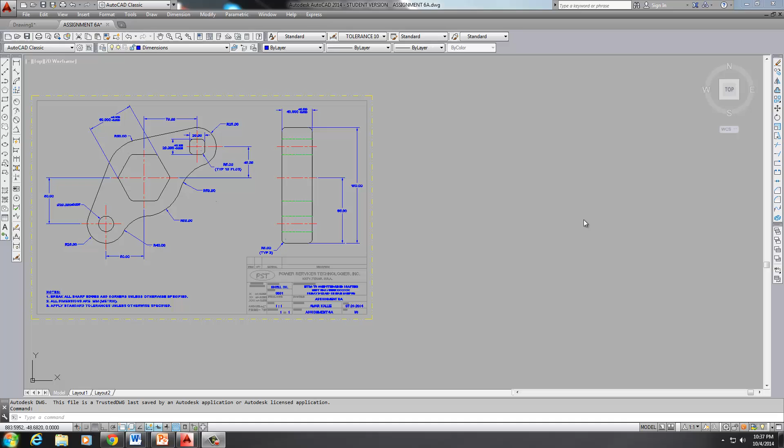I'm just going to show you how to draw this piece. This one is not that hard, should be pretty quick and easy.

First of all, you take a look at your part and you see that everything is based on this center point. So that's what we're going to work off of, surrounding the part around the center, start building it.

So we've got a polygon right there, we've got a circle right there, as you can see, and then we've got positions for these center lines here that we need to create by offsetting these numbers here that you see. So it's offset, then we've got offset for that one and for this one to get the position of this, and it's another polygon in the center of that, and it's a circle and another circle and another circle there as well.

Then all you're going to do is you're going to line, do a tangent. Remember back to our first assignment, 2A, where it had the light bulb and those circles that you had tangents to. Basically it's just a line, tangent to this circle, tangent to that circle. Another line, tangent to this circle, tangent to that circle. And we're done with those two lines.

Then to create these two radiuses here that you see, it's going to be a fillet. And of course there'll be a circle here. And you're just going to fillet between here, this radius. Fillet, radius 40, and touch the two circles, and it automatically puts it in. And that should be it.

And then I'm going to show you really quick a shortcut on how to quickly put fillets on all these edges that you see. Very quick.

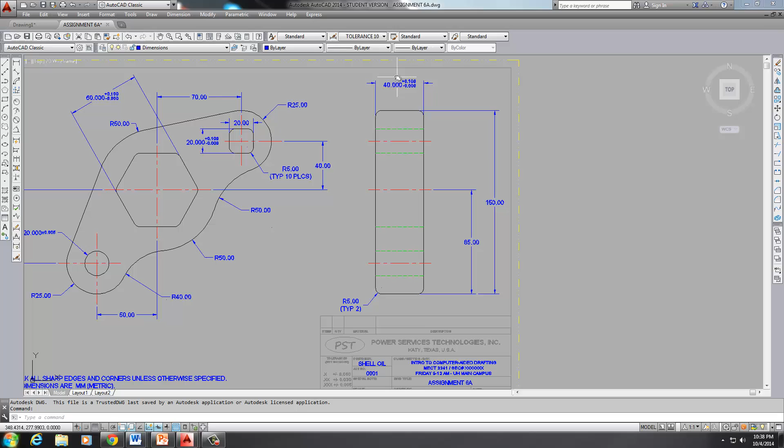Alright, and this is basically the projection, gives you the thickness, and that's where you find your volume and your area. You need those numbers. Alright, so we'll do it really quick.

So let's see here. Got to go back and forth with the numbers. Probably, let's see here, we've got radius of 50. So let's start off with the circle.

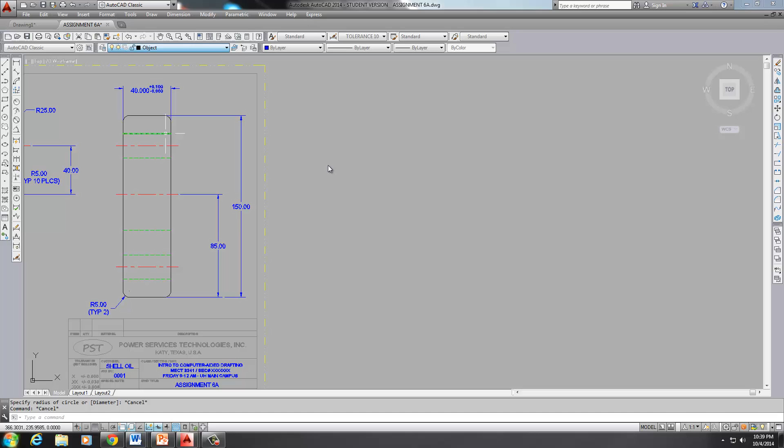Make sure I'm in my right layer, which is going to be object. And let's start off with that center. Just put the center lines in first. We could put that circle in if you want, which was what? A radius of 50. There it is right there. That's radius 50. So I got that.

Then let's do a polygon. Center of, polygon. How many sides? 6. Center, right there. And it's circumscribed or inscribed. You always want circumscribed. That defines, it's defined by the flat to flat dimension, which in this case is 60. So circumscribed. And what is the radius of that circle? 60. Ooh, and I put 50, didn't I? So let's get rid of that.

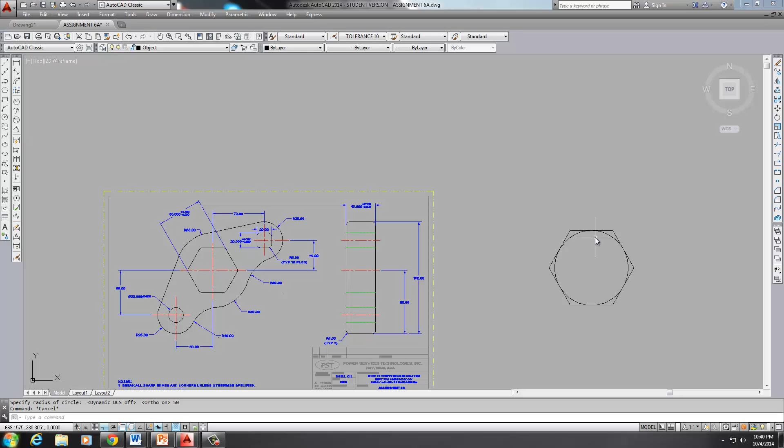And let's do a polygon again. Number of sides 6. Might be better if I typed right. Circumscribed. Hit F8 and your piece will stay straight. And all you do is hit 50 for the radius. And there you go, that's circumscribed. Is that correct? 50? No, it wasn't 50. It was 60 between flats, which is half of that, which is 30. So let's do that again.

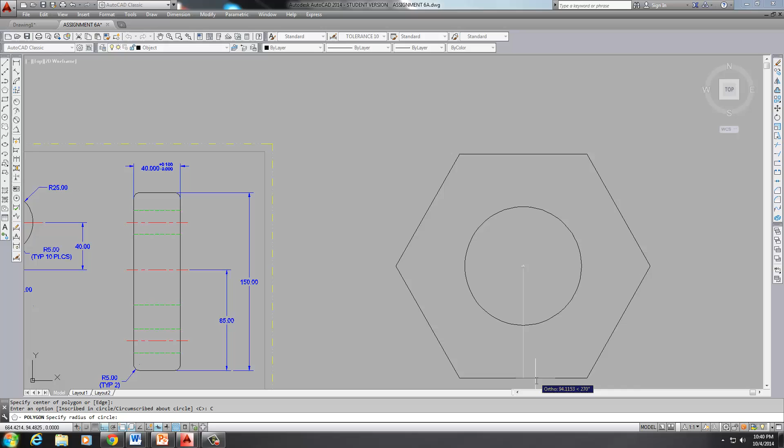We all make mistakes. 6. Center is right there. Circumscribe, and it's straight, right? And what do I want? 30. There it is right there. Now that's your hexagon in the center.

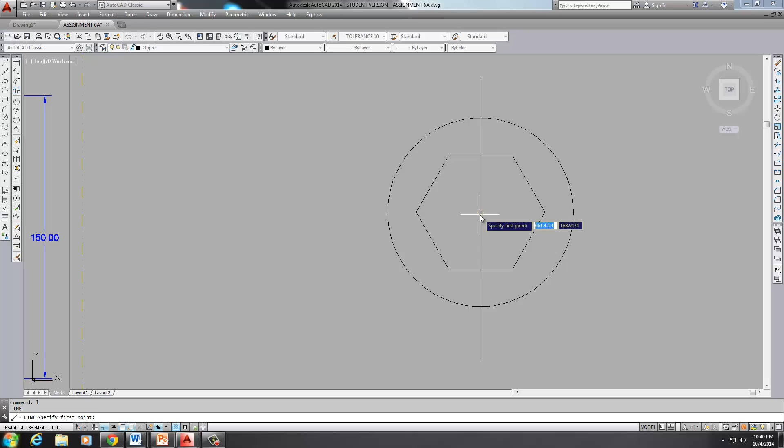Now let's go ahead and draw some center lines. Just put some lines in. Just extending them down. Do another line. Center of this piece. Out. Come out here from here to here. And then what do we do? Change this to a center line layer. So I have my center lines, right?

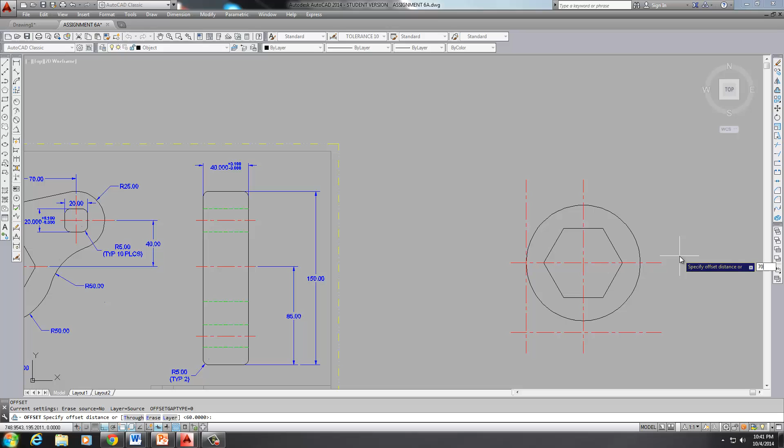Now I can do my offsetting, which would be 60 in the Y and 50 in the X for this side. So offset 50 going X, going to the left, and 60 going down in the Y. And I've got my center point for that. Then let's do the other side, which is 70 over and 40 up. Offset 70 over and 40 up. And I don't have an intersection, just grab that and just go across, so I got some kind of an intersection there. Alright, so now let's draw.

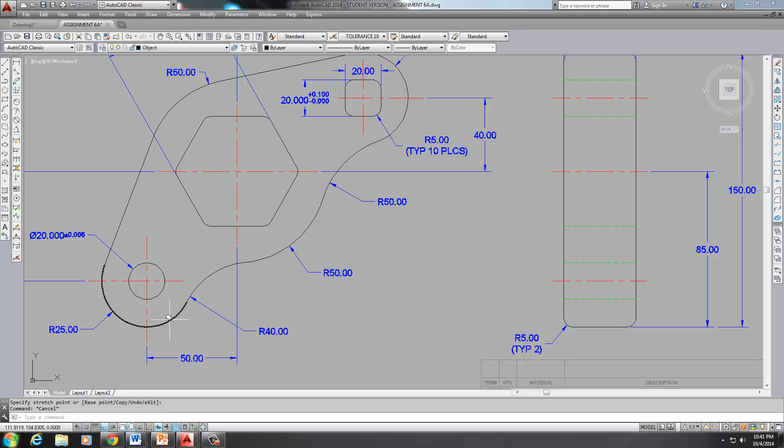What do we have here? We have two circles, one on the inside, one on the outside. So let's do those two. One's a 20 diameter and the other one's a radius 25. So let's draw a circle. It's going to be at this center point. Diameter of 20. And then another circle, center of that again, and that's a radius of 25. There we go. Circle over here, radius of 25.

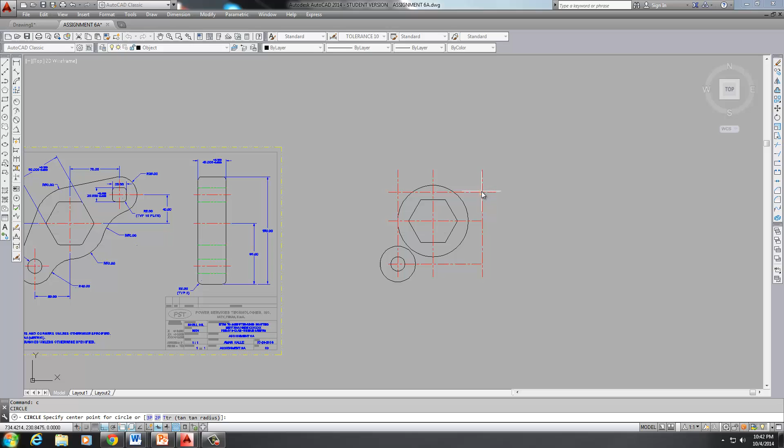And then we're going to put a polygon inside there. Polygon. How many sides? 4. Center is going to be CEN.

And circumscribed, right? And what is half of 20? Ten. There you go. So we've got those parts.

Before we do anything else, I'll show you how to put the fillets on these quickly. If you notice, when I put my mouse over it, it's called a polyline. It's one piece, and a polyline can be edited using a command called pedit. Now, in our case we're not going to use pedit, but I just wanted to show you what you could do if you had a polyline. These are all the options - you could join it, change the width, or change all kinds of things. In our case, we're not using that command, but it is available.

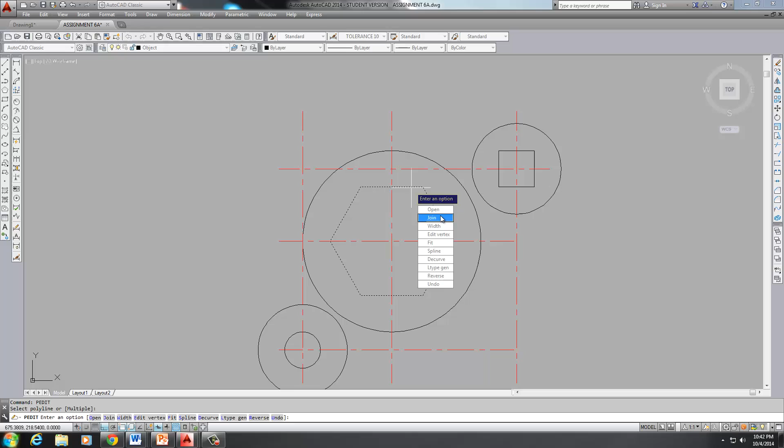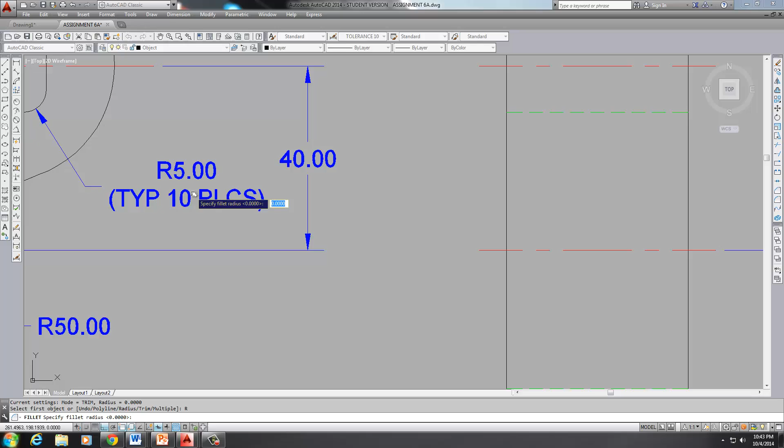In this case, we just want to do a fillet, so we're going to use F. Down at the bottom you've got some options again. This is a polyline, so I'm going to pick polyline. But before that, let's get a radius. What radius do we want? I believe those are radius 5 in 10 places, which means 1, 2, 3, 4, 5, 6, 7, 8, 9, 10. Those are your 10 places. So it's a radius of 5.

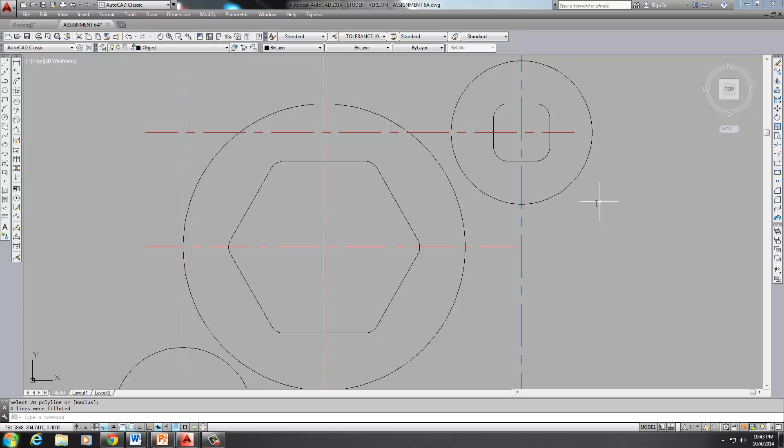Now I want to do a polyline, and I'm going to pick this one polyline right here, and look what it does - it puts a fillet on everything in one shot. Do it again, polyline. I'm going to make sure I hit fillet and polyline again. It only lets you do it once - you have to hit polyline again to do it again. There we go, so I've got what I wanted to do there.

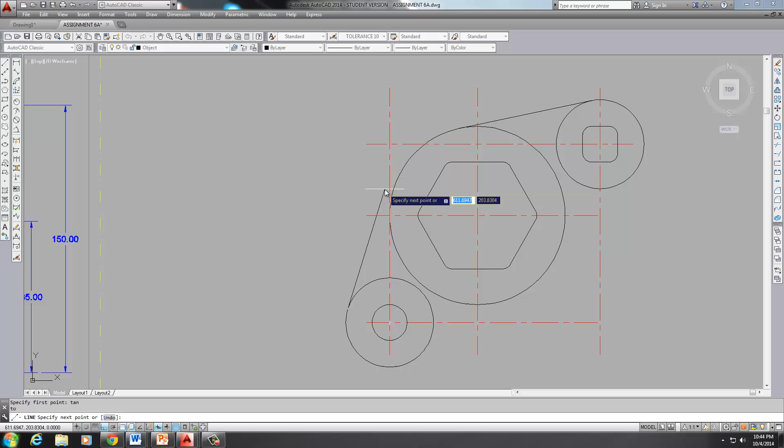Now let's do that thing like I said for assignment 2A, which was a line going from tangent, T-A-N, of this to tangent of this. Another line, tangent of this to tangent of this. There's the top piece of that.

Now, the two lower ones are two curves, right? Two fillets. So why don't we use a fillet? Now you can put a circle in there and trim out and all that stuff - you could do that too. 2-point circle or TTR, because you know the radius, so you could do that too. But we're just going to do a fillet. And what's the radius of the first fillet? It is 40, so we're going to do R 40.

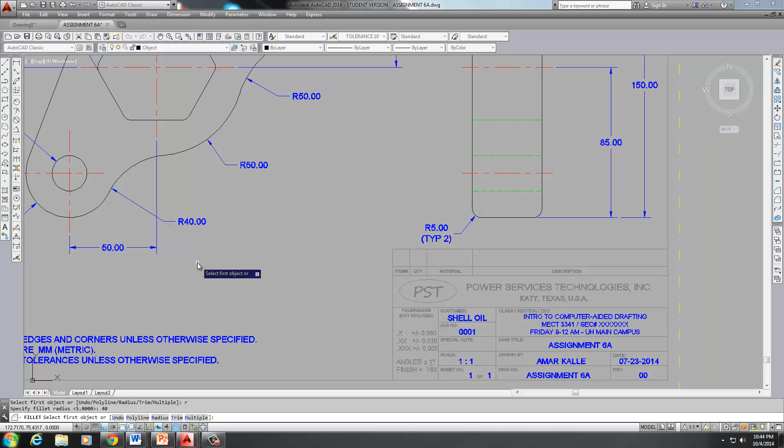All I do is touch this circle right here, touch this circle right here, and it puts it in for me. Now what about this one? It's a radius of 50. So let's go fillet, radius 50, and touch that circle, and touch this circle, and guess what - it puts it in for me.

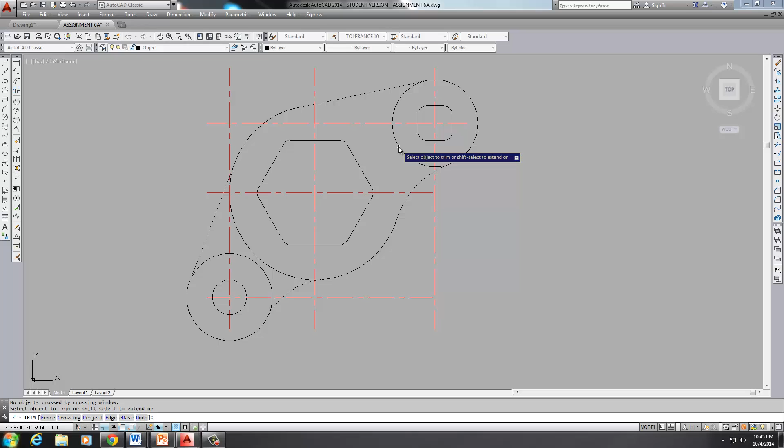Now what I need to do is trim. So TR, let's trim out from that, and this, and this, because everything on the inside should be gone, right? So that's this, right, this, and those two. There we go - so our part is pretty much done.

All good. Now you just need to put dimensions on it, and I'll let you guys play with the dimensions. That's just a matter of trial and error, and everything should be good.

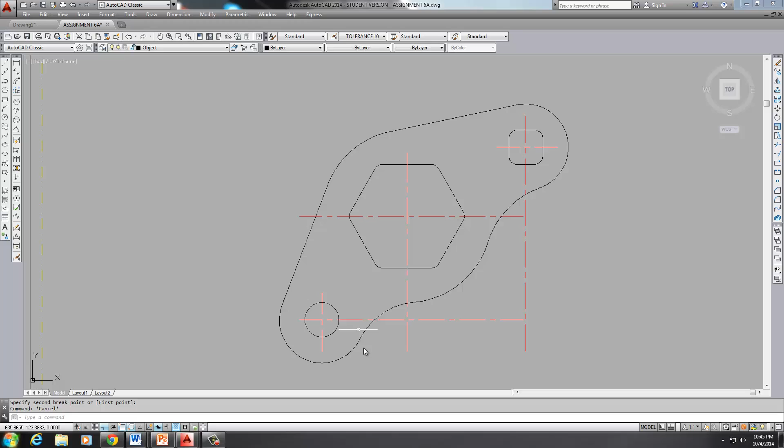Now, another thing, just to quickly show everybody - these center lines, we could shorten them up a little bit by hitting break. We can use the break command, BR. All you do is touch it where you don't want it, touch it right there, and anything outside of that, it takes it away. So break from here to the other side, it's gone. Break from here to the other side, it's gone. Break from here to there, it's gone. From here to here, it's gone. From here to here, it's gone. And from here to here, it's gone.

And you can shorten these up too, if you want to. That's how we do it, really quick. Just shorten up there. All right, so that's how we do it.

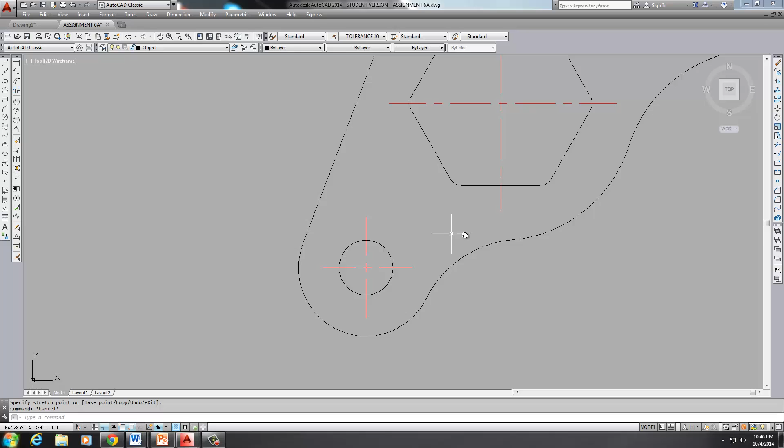Now, of course, you can see it's not sitting on the center. So in order to get that to come over just a little bit, I'm just going to extend this a little bit to get it longer. And this one too - I'll extend it so I can get a little crosshair in the center, just so I got an idea of where my center is. It doesn't have to be perfect, but it should be something close. All right, and that looks like that's about it.

And of course, the tolerances command is on your dim style, which is dimension style. You have to create a new one based on what tolerance you're looking for. In my case, that's tolerance 100, so I'm going to modify it. And I move over here to tolerances. That's a deviation style, which means the upper and the lower limit, or the upper tolerance, lower tolerance, are different - that's a deviation. If I make it symmetric, well, that means it's going to be the same plus or minus of the same amount, which is my tolerance of 5.

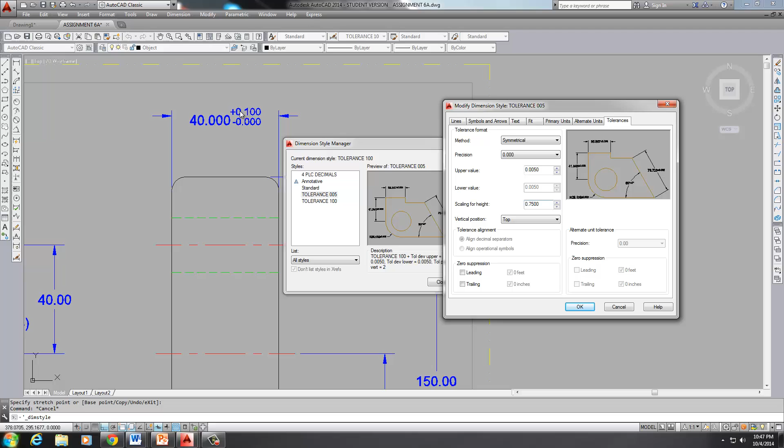I'll show you what that looks like. It's in symmetric, and that means it asks you for one value, and that's what it does. Always have your tolerances a little smaller in text scaling, so it's 0.75, a little smaller than your main text, so that it doesn't overshadow or overpower the original dimension, which you can see here in the 40 I've got here. All right, that's about it.

And remember, you have to set it to current. So dimension style, set whichever one you want current before you do the dimension, so it will use those settings to create your dimension. All right, thank you very much.